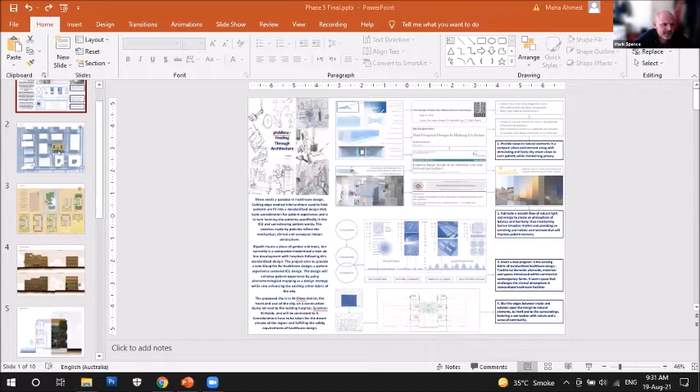And just seeing how your plans were orientated, I have confidence that you understand all of that. But then the 3D model of the site, I think the second page, just the fact that it is in a dense site, just how the light kind of moves, and how you can present how light will get into the space, it just kind of helps us to be convinced by the strategy.

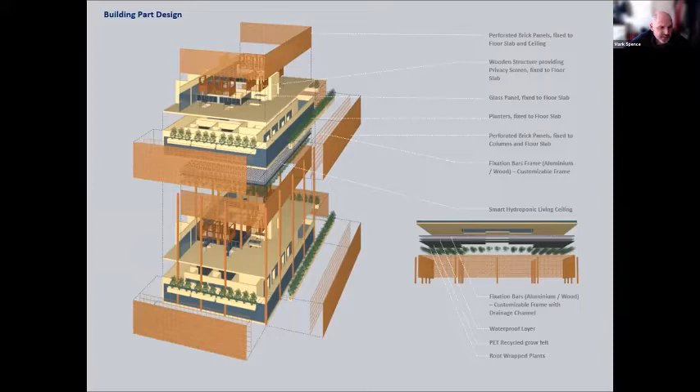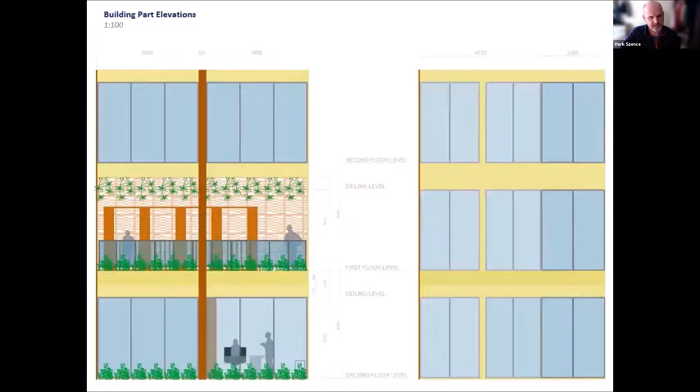But apart from those kind of comments, it certainly was the most complete presentation I think we've seen all day, and I think the cross section through the courtyard, I mean, that's a great drawing in terms of just being able to explain the various spaces. But I think

if you go back a page, it's an incredibly powerful singular drawing, because on one side it explains the material and the atmosphere and the quality of openness that you get, and then on the other side we get to see what that looks like in a very traditional kind of architectural drawing. So no, I really compliment you on the work you've done. So thank you, it's a great presentation.

I wanted to create like this clinical but phenomenological presentation that captures what I'm trying to do. Yeah, and I think it's good, because I know that what Justin had articulated in terms of the types of drawings he required is just trying to cater to everyone. But it's good that you've built upon that and added drawings that give a lot more meaning and a lot more relevance to, I guess, your project.

And I think just the importance of the courtyard, and thinking ahead about your final presentation, I can see that there'll be a lot of discussion about the importance and the value of a courtyard, particularly in the environments in which you're dealing with. So no, thank you. Thanks, Maha.

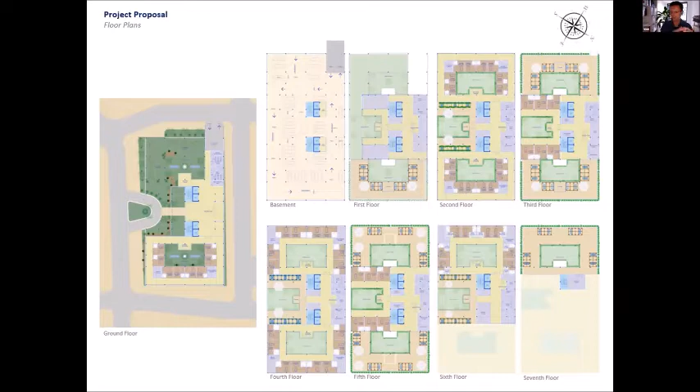You know, you described the intent, you described the problem, and the problem was that people aren't getting as healthy in hospitals as quickly as they could, and that built environment matters, and that you wanted to address that. And I think you definitely demonstrated how to address it, and you had evidence of that along the way, which I

thought was very helpful. I thought your drawings, the black and white and the color together, the types of drawings that you chose to represent your scheme were well selected. And I think having the video at the end was really helpful as well.

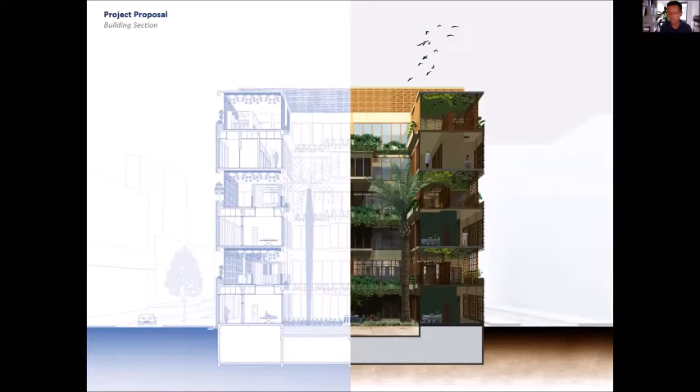We saw that you're definitely becoming an architect, and that you're able to pull all of those items together and create a comprehensive scheme that makes sense, that has logic, that has beauty, has qualities of skin, material, constructability, movement, logics, and so on. So I'd commend you on that. I think it was a fine presentation. I think it's a fine building outside of the ICU component.

The other aspect, I suppose, that could have been considered more, given you're in a hospital realm where clean air and health and those things are so critical, is a smart facade, or the thickness of the facade. I think a study of that is more warranted, even more than you've shown. Yes, you showed the brick screen and the glazing and so on, but perhaps you need air ventilation between two skins. It could be quite a thick external skin, particularly in a really hot environment.

I know you've got the shades on the outside and so on, but there's significant heat loads, and you might circulate air on the outside of the facade without it contaminating what happens inside so much, and particularly isolating particular areas and so on.

So there are more complexities in a hospital than you've really allowed for, but I think at fifth year level, undergraduate level, and I do call it undergraduate, I know you're a master's, but it's actually a first professional degree, and you need to do those 5 years to go and become the architect. I think it's a very sound project, and you should be very happy with the work that you've done. It's quite a beautiful thing as well, and that's really nice to see. And for me, beauty means a lot.

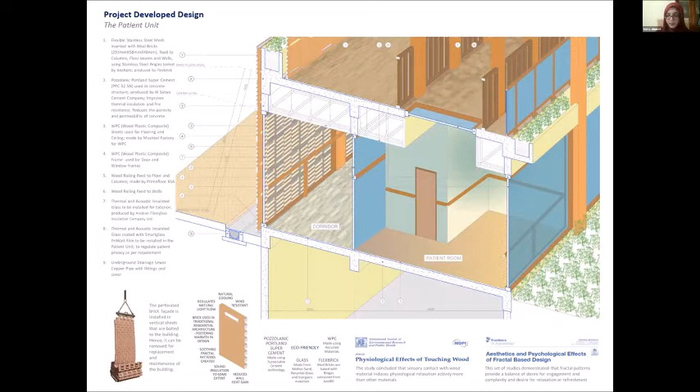I wanted to ask you about brick. Is there a reason why brick was chosen as the material? Is that a local material? Yeah, because traditional domestic design used a lot of brick, and so I used perforated brick as an innovative way to integrate that, so that the place feels more like home and warm and comfortable.

And also perforated brick specifically reduces sound, cleans the air and regulates airflow. So in a place where there are regular sandstorms, using this perforated brick will help to cleanse the air and keep the air cool in this hot climate. So the properties of brick itself is why I use brick. Oh, I mean, look, we use bricks all the time, but the way you've just answered that question could have been a good slide to just talk about bricks.

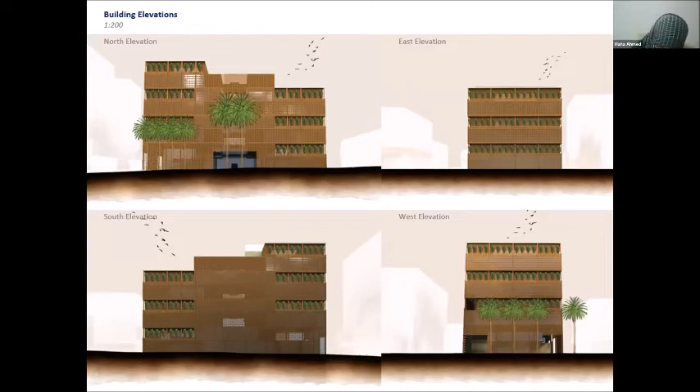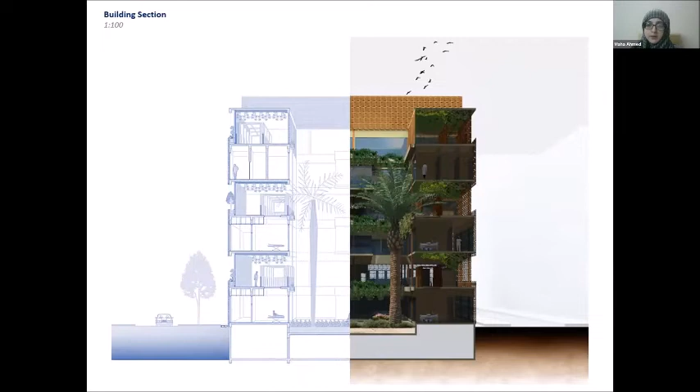I also wanted to ask about the challenge with doing brick screens, which is the weight of the bricks, and therefore the support structure behind that. Is it a steel frame that supports the bricks, or are they clipped into place? They are fixed to the columns and to the floors. In parts where there is artificial ventilation, we have glass for health and safety. So the facade is fixed to the columns, and in open spaces, it is fixed to the ceiling and the floor slab.

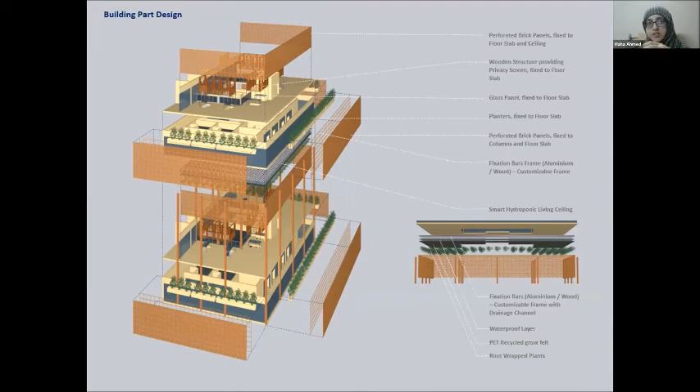Okay. And in terms of the cavity between the brick screen and the glass, is that separated as well? There's, I think, 50 millimeters between the brick and the glass. I did some research and that distance will stop pigeons and others from nesting in the area, though it will be hard to keep clean. And that little 50 mm space also reduces the sound by a lot. So yeah, I think one slide should be on why I chose brick and the material.

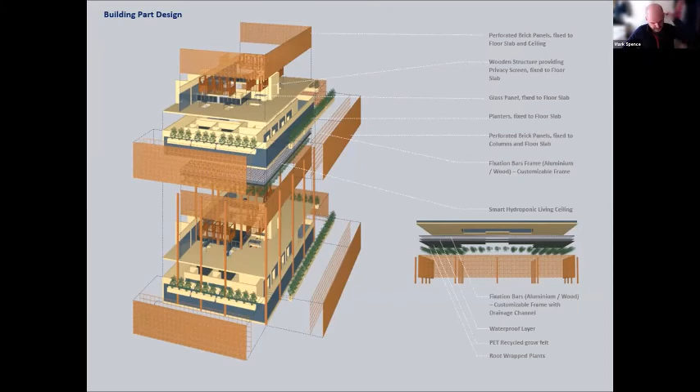But I was just thinking, to show your building in relation to the surrounding buildings in context, it might be useful to do a long elevation, just showing the height of your building compared to the other buildings, to show the overshadowing and then the potential light quality, and how that all works.

And the other thing I could add for the perforated bricks is another really good thing: it increases the surface area of the wall. So this mass wall actually has the ability to absorb heat much more than normal, and it cools the air. To that end, for the internal spaces it would be more useful if the glass was on the outside and the perforated bricks were on the inside, because then it'd benefit from that cooling effect.

But I'm not sure how that would stack up in terms of hygiene; it's kind of in conflict there. So you might do that on the open areas where you want to get that cooling of the perforated brick to actually work really well. And it's been done. Horizontal openings, it's open. There's no glass there. Yeah, right. So that's fine. So it'll work there. Yeah.